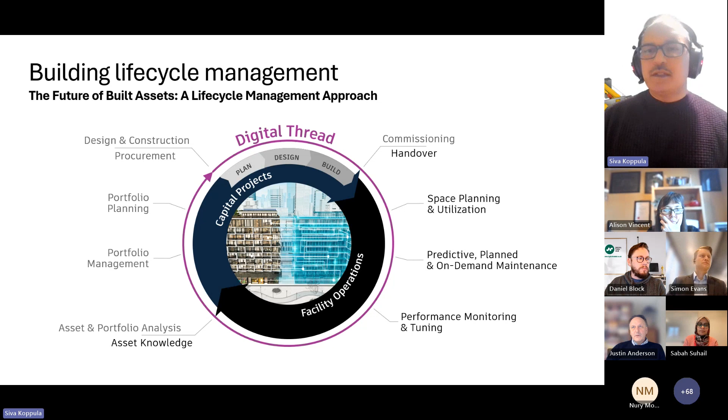So building lifecycle management approach considers a building's entire lifespan, covering all phases from design to demolition. In this approach, data becomes a valuable asset, offering critical insights throughout the project lifecycle. By emphasizing the continuity of data throughout the asset's life, we gain valuable insights that enhance decision-making, optimize building performance, and contribute to objectives such as sustainability and social well-being.

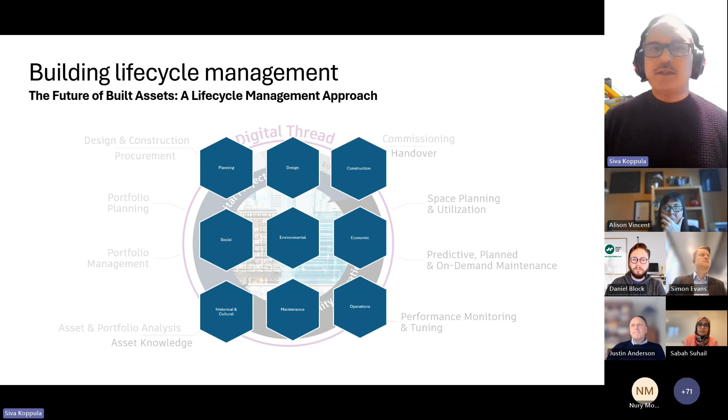While cost is often considered as a primary driver in the AEC industry, this approach also considers other important aspects such as environmental, sociological, cultural factors, among others. So why is adopting a BLM or a building lifecycle management approach so crucial?

To understand this, we partnered with IFMA, and there we surveyed a diverse set of owner-operators. The findings were quite revealing. A significant 85% of owner-operators grappled with issues related to fragmented data and compromised data quality. And probably because of this, 95% of the engineering and construction data goes unused in operations.

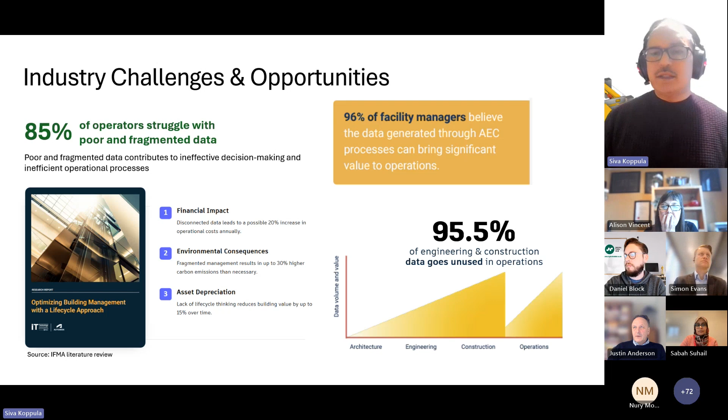This data fragmentation and quality issues also translate into further challenges, including financial impact, environmental consequences, and asset depreciation. These problems are largely, if not predominantly, due to the absence of a building lifecycle management approach to data. However, there is an opportunity, as around 96% of the FMs or facility managers believe they can benefit from access to the design and construction phase data during operations.

So some of the benefits that we can leverage by using this approach during different phases of the buildings are listed here. For example, during planning phase, you can use this for long-term efficiency by integrating operational insights into the initial design phase. Likewise, there are benefits during the other phases of the building lifecycle as well.

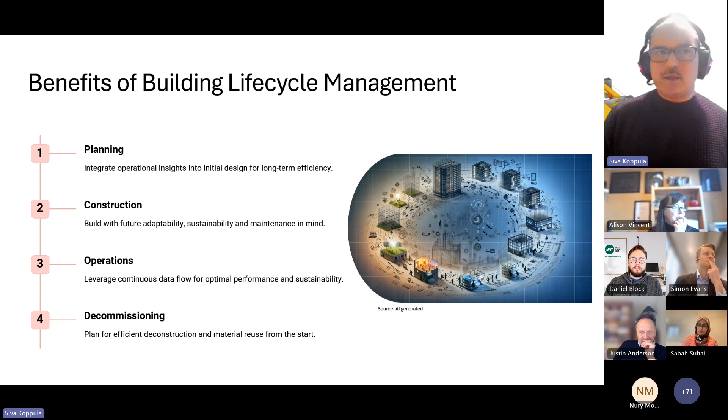However, some of the challenges in implementing or adopting this approach include, for example, fragmented data. Data is often siloed across different teams and disciplines, because individuals tend to take a short-term view and focus narrowly on the specific scope or phase of work. Also, there's a need to embrace a data-driven culture in the AECO industry and invest in upskilling the workforce.

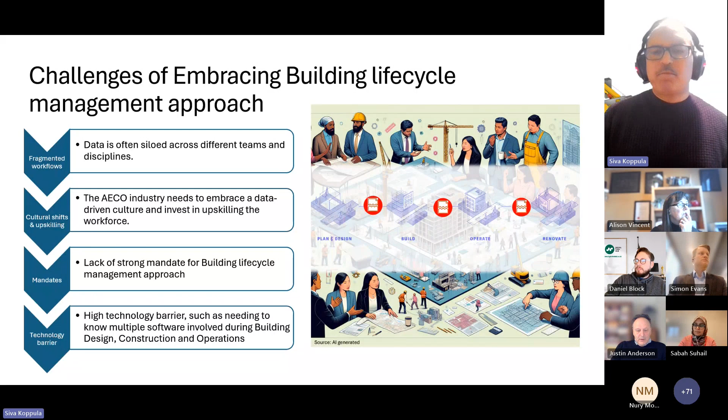A lack of strong mandate or incentives is also another reason, although I think the golden thread requirements emerging from the Building Safety Regulation Act for England will certainly encourage the industry to adopt a BLM approach for data management. Technology is also a barrier, particularly for those who are not familiar with or involved in the BIM process, as they cannot contribute due to lack of access to the software or the skills to work with it.

So now let's look at how digital twins enable and leverage this approach. Everyone in this call is familiar with digital twins. I won't go into the definitions of those. But I think digital twins pave the way for building lifecycle data management by creating a digital thread or golden thread of data continuity. Digital twins facilitate the maintenance of a digital record of essential building information, starting from the design concept phase and continuing throughout the building's lifespan, thus enabling a building lifecycle approach.

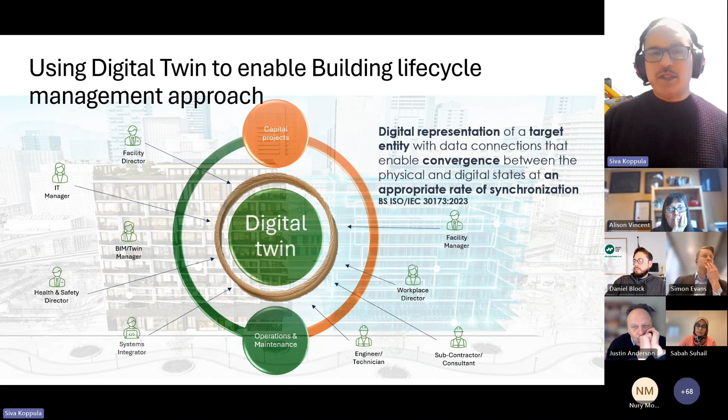Digital twins also simplify the technology complexity by offering an easy-to-use web-based interface, eliminating the need to download or master complicated software. As a result, they enable a broad spectrum of stakeholders to participate at the relevant stage or phase of the project. They foster increased collaboration among a diverse group of stakeholders, integrating the building lifecycle approach through different phases of the built asset.

Furthermore, a digital twin facilitates early involvement of stakeholders, which promotes informed decision-making. This early engagement and enhanced interaction fosters trust in the data, minimizing the delays during data handover and improving the downstream usage of data. During the planning and renovation phase of capital projects, this data is readily accessible for the planning team to make insightful and data-driven decisions, thus helping realize the benefits of the building lifecycle approach.

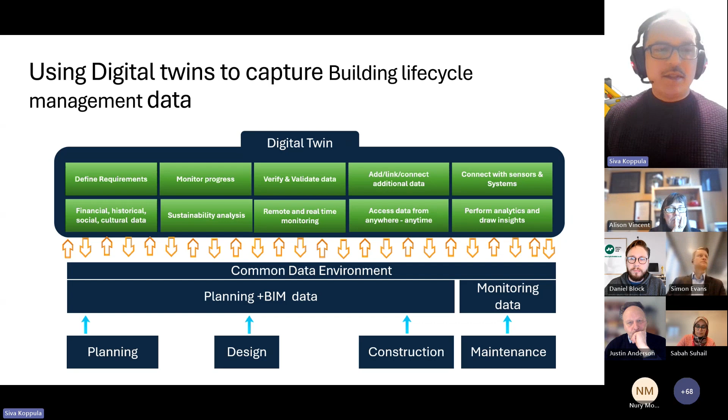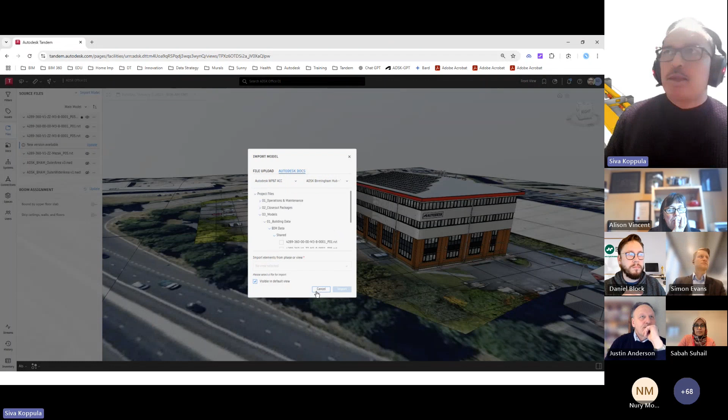To add the data to a digital twin, all that you would need to do is point to the location of the data, either on your servers, or if you're using a common data environment platform, you can just point to that, connect to the data there. And then if there is an update available for that data set, you get a notification right here in the digital twin. You simply click on this update button. It'll compare what has changed from the version in digital twin versus the new updated version, just brings in the data, and that's all. Your digital twin is updated with the latest data.

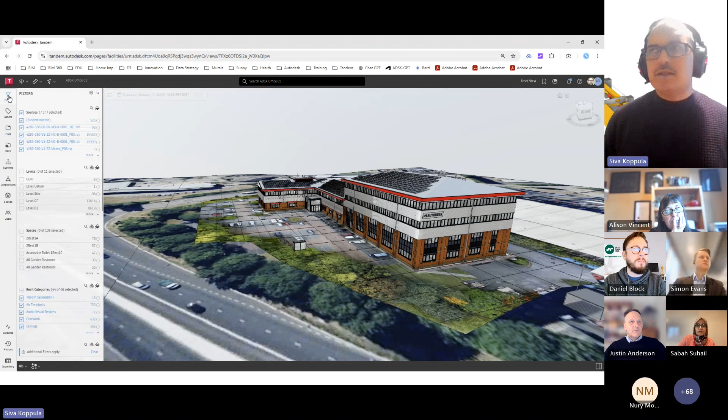Once the data is here, then the digital twin is doing a lot of things behind the scenes, but you can filter the data. For example, in this case, if I want to filter the data using any of these parameters, I want to see the data on ground floor, so I can just click on it. But this is the power of the data. So once you're following a lifecycle approach and using a data-driven approach here, I have these 100-ish parameters defined during the operations phase of my building operations, and I can use any of these parameters to query my digital twin.

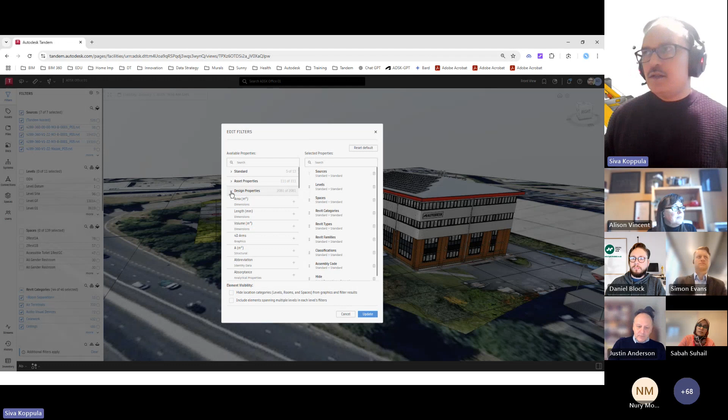But the good thing about here is the data continuity. So I also have around 2,000 parameters on which information was collected during the planning, design, construction, installation phase. I could use any of those parameters as well to query my digital twin. So now I see I can query the data by assets or by room sizes. So this is one good example of showing how you can use digital twins to have this data continuity or golden thread or digital thread of information.

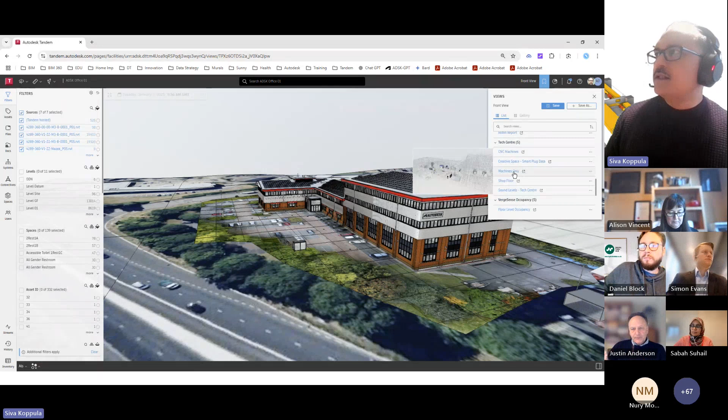But another good use of digital twins that support this concept of PLM is around how we can enable wider participation. So for example, you could expose a view like this, and let's assume a scenario where someone is coming to install these machines in the shop floor. Typically, what they can do is they can install the machine. They can just click on it because this is just a web-based browser. They don't need to know any software for this. And they click on an asset. They add the information for this asset. That's all. It's as simple as that.

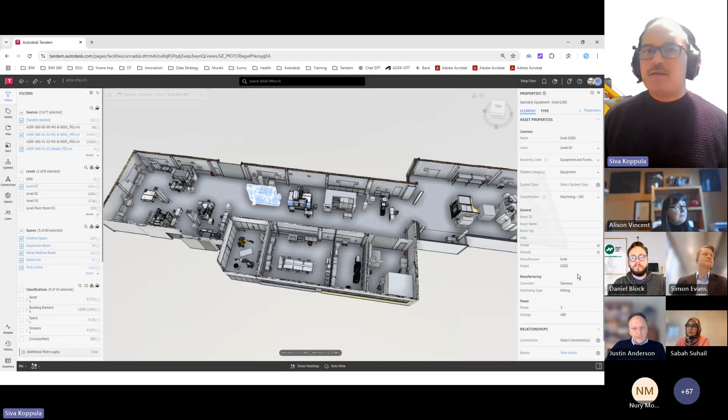They can attach documents. They can attach videos. They can attach pictures, whatever. They can also use tabular views if that makes things easier. They can also import, export data from Excel files, for example, to speed up the process.

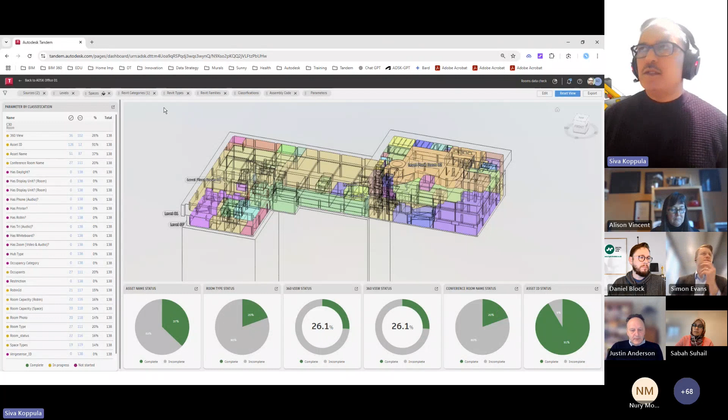Once this is done, as an owner-operator, what you could do is you could use dashboards, built-in dashboards, to check for the data completeness. Here you can see a full list of parameters, but here you can see the data for, let's say, the vital parameters or important parameters. And this is all live, so I can go here and change the level or filter criteria, and I can see how the data is changing for those things. So this is how you can continuously build up the data into your digital twin as the project is progressing and by the people who are responsible for the data.

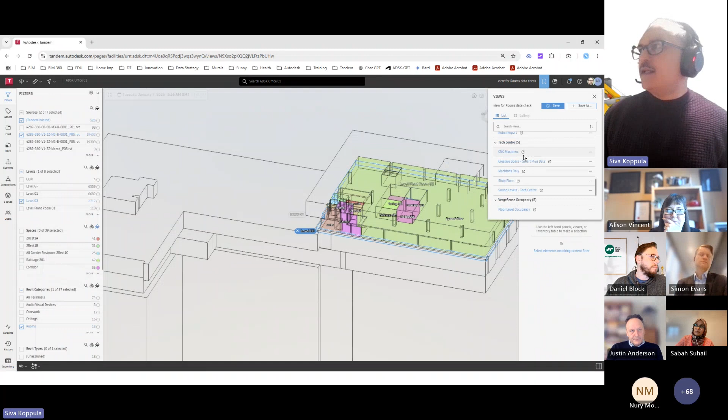The other thing you can do is once you move into the operations phase, you can augment this digital twin with additional data. For example, in this case, because it's a workshop area, we have installed sound monitoring sensors to monitor the health or to ensure the working conditions are good. And with this digital twin, we can monitor the sound levels. We can see the trends over a period of time and so on.

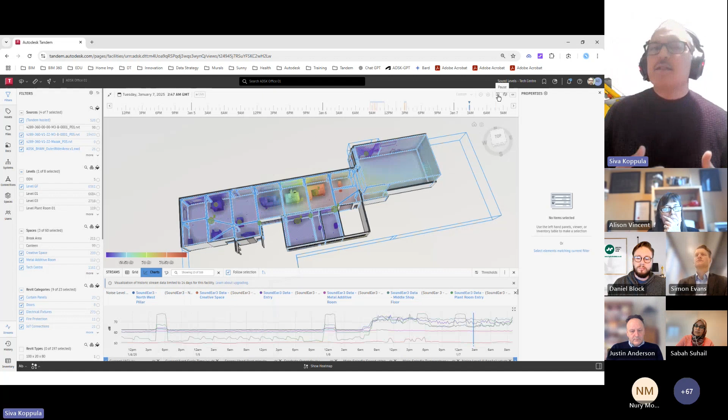So this is helping us to define a baseline, create a baseline, and then take some corrective measures and see if whatever actions we have defined are working or not working using digital twins. And it's a data-driven approach. So whatever decisions you're making are validated by the data.

30 seconds left, Siva.

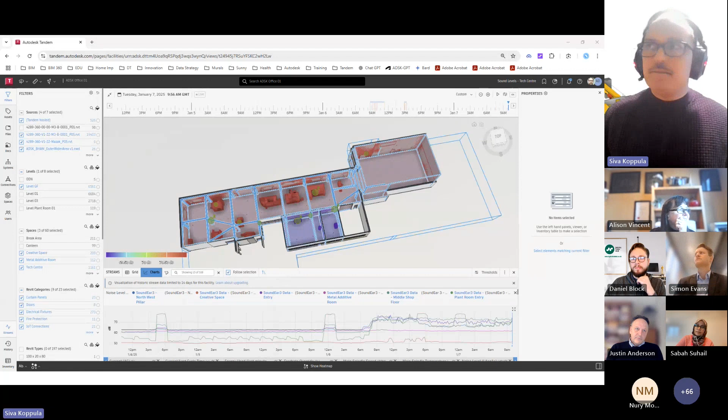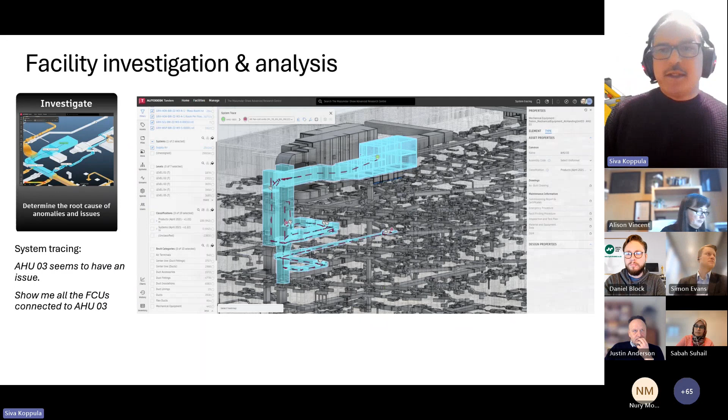Okay, I'll switch back to my PowerPoint. In addition, if you have the BIM data, you can also leverage it to do this kind of trace analysis, again using the BIM data during the operations phase. These are some of the examples. If you're interested in any of these, please feel free to reach out to me. Thank you.

Our next question is, what file formats does Tandem work with? Is it able to use IFC for the model, or does it rely on proprietary data formats? Tandem currently works with popular formats such as Revit, Navisworks, and 3D CAD files, but of course it also works with vendor-neutral formats such as IFC. There's full support for IFC as well.

Next question: how would you define fidelity in this context? I think fidelity and also data frequency are both critical parameters for digital twins, and both are defined by what is the purpose, what is the use case. So the use case and the outcomes you expect from your digital twin will define the model fidelity and also the frequency or cadence of your real-time data.